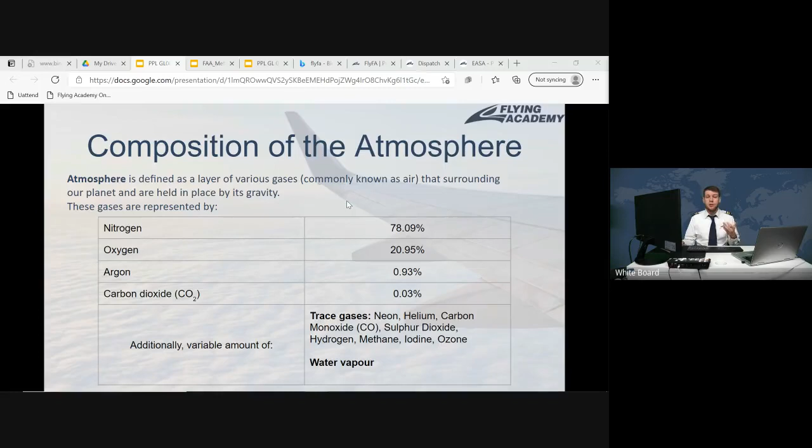Okay, so this is the general composition. And since the atmosphere is composed of gases, those gases in turn compose of what? They compose of molecules, yes? And molecules are physical objects - they are small, but yet they are still physical objects. So they have to obey physical laws, and they have physical characteristics, properties.

So among the properties of the atmosphere, because it's composed of physical objects, we distinguish the following: the most important, the main ones, are density, pressure, temperature, and humidity. So now let's speak about these properties of the atmosphere and how they are interconnected. It's important to understand the relation between these processes - which processes affect what processes and why.

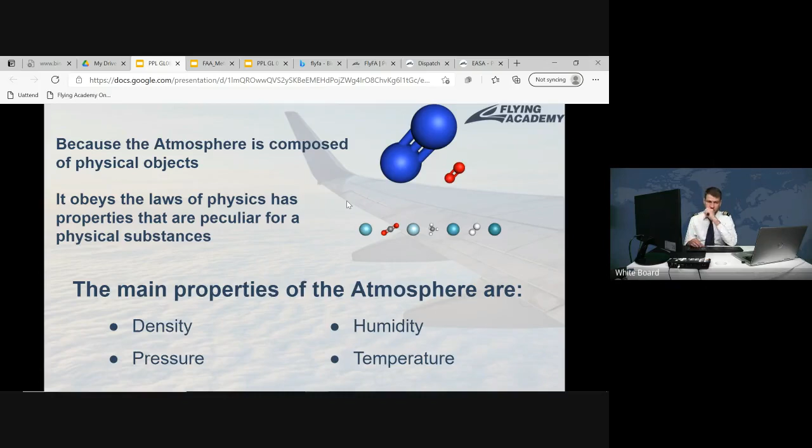So let's start with the density. The electrical charge - it is also a property, I mean a physical phenomenon, but it's caused by friction, basically by friction between the molecules. So we may say it's a secondary property. The electrical charge is not directly participating in the weather phenomena that we are describing - it's like a consequence.

Okay, so density, no problem. Density can be defined as the mass per unit of volume. Normally, those SI units, international standard units, operate with the parameters of kilograms per cubic meter. So this is the density - basically the amount of molecules per unit of volume.

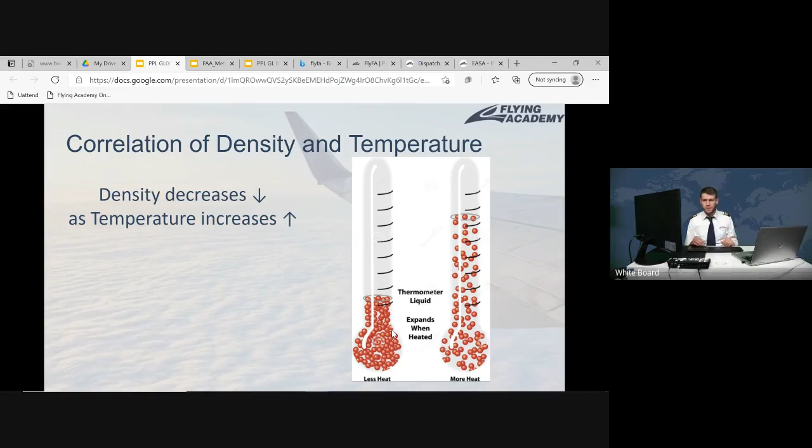So where is this force originating? Molecules of the air, as any other fluid, are in constant movement.

So we have some problem with the internet.

The video is slowly loading, but those molecules have certain movement. And when they collide with the ceiling of the container, with the walls of the container, they exert some force. So this force transferred per area of the container where they collide produces the pressure. So if density increases, pressure increases as well, because you leave less space for those molecules.

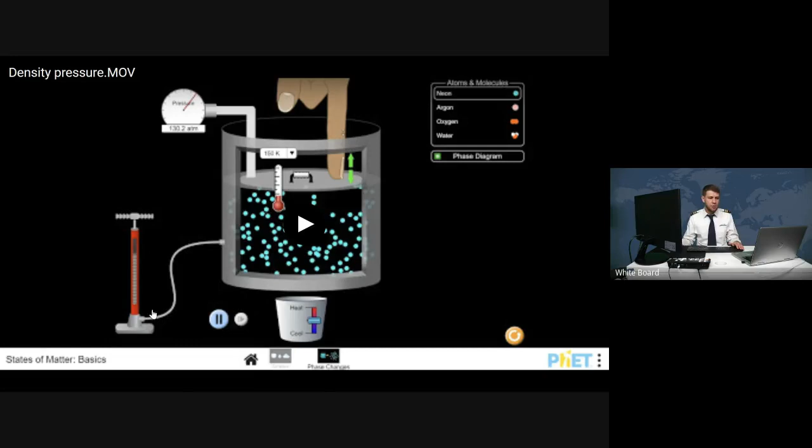So you leave technically less space for molecules. They collide with the ceilings of the container in this example more often, thus exerting more force. So your pressure increases. Plus, you decrease the area. So even though the force is the same, you're reducing the area, so the pressure is rising. Clear?

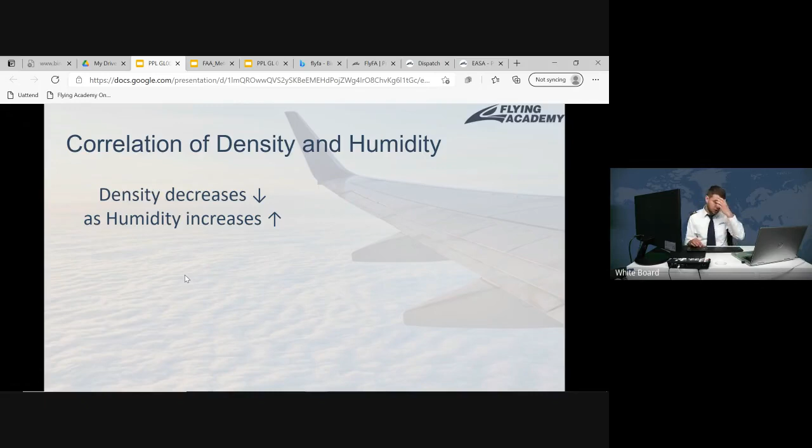Next one. Density and humidity. So when humidity increases, the density actually decreases. We are now speaking about the density of the air. Why does it happen? If we go deep inside the physics, we have Avogadro's law, which says that equal volumes of gases at the same temperature and pressure contain the same number of molecules, regardless of the chemical nature and physical properties.

But more simply speaking, the molecule of the dry air weighs more; it has more molar mass than the molecule of the water. So when you have some parcel of air, and you substitute molecules of the dry air, which has higher molar mass, with the molecules of water, which has lower molar mass, you will reduce the weight.

And since the density is defined as kilograms, correctly speaking it's not the weight, it's mass, okay? If to be super precise, it's mass. Weight is force. Mass is the quantity of the matter. So we are speaking about the mass. So you will stuff this parcel with lighter molecules. You will decrease the mass. Density is kilograms per cubic meter, so you decrease the density by the physical definition. Clear? So less kilograms, less density. Good?

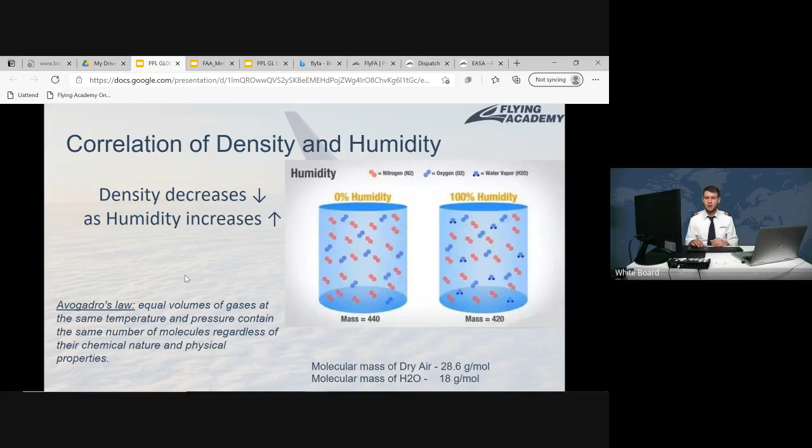Next one. Pressure. What is this? Pressure is the force which is applied per certain unit of area. You should remember this from the principles of flight. So this is the force applied per unit of area. Force is measured in newtons, area in meters squared. And this force, newtons per meter squared, is the pressure, which is pascals.

When we are speaking about the atmosphere, where is this force originating from? We have the mass of the column of air, the mass of the atmosphere. This atmosphere is, wait a second.

So we have the atmosphere. Atmosphere is composed of gases. Gases are composed of molecules. Molecules are physical objects. Physical objects have mass. So you subject this mass to acceleration, and the acceleration is what? Our gravity. So you take the mass, you subject it to gravity, and you receive your force. And then this force, per unit of area, gives you the pressure.

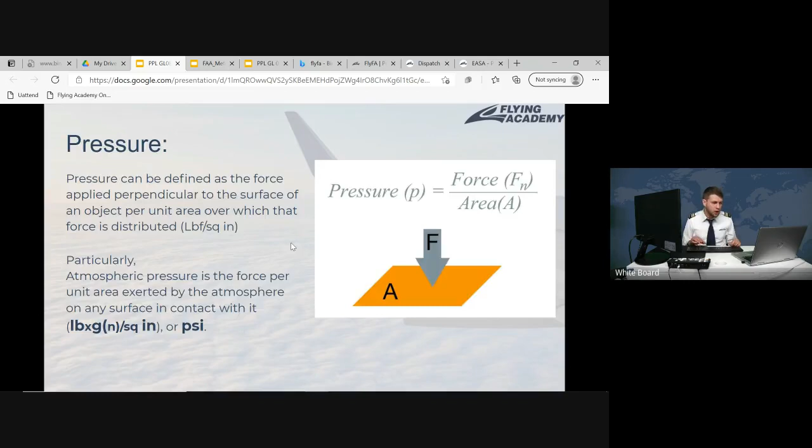So now let's speak about the correlation of atmospheric pressure and height, because technically this is the most important thing to understand here. As the height increases, atmospheric pressure decreases. Why does it decrease? Because our atmosphere doesn't exist endlessly. Somewhere it ends. And the atmosphere is molecules. Those molecules are spread up to a certain extent, and then nothing, and then space.

So by this logic, we understand that we will get less and less molecules the higher we go, because somewhere it should end. Plus, lower layers of the atmosphere contain more molecules, because imagine the top level, the end of the atmosphere: you have a certain amount of molecules, but there is nothing from above which pushes them down, because there are no molecules.

Then you go a bit lower, you have slightly more molecules. And these molecules are attracted to the Earth by the gravitational force, plus by the force that the upper molecules exert on them. And then you go down, the same process, but more and more molecules above you are pushing you down, all the way to the ground, to your observer's position.

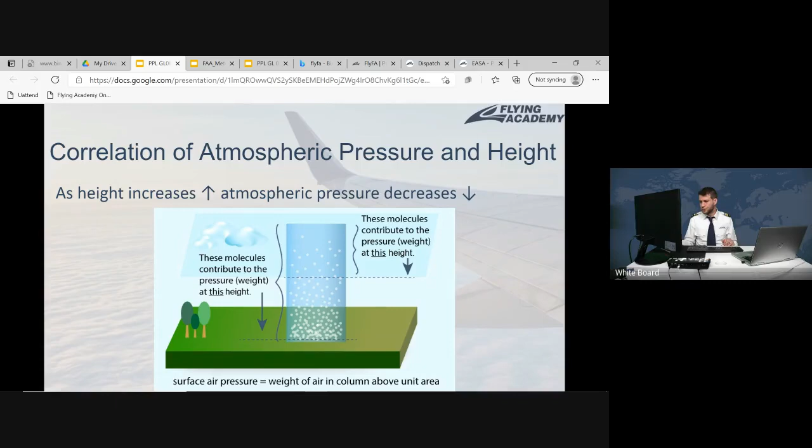Speaking of pressure, this relates to the international standard atmosphere, but the slide specifically about the international standard atmosphere will be later on. But we have the concept of standard pressure. Pressure may be different from day to day, from period of day to period of day, from location to location, but we have a standard one.

Yeah, science likes a lot to, wait a second, David, Nahmat, if I could ask you to disconnect the camera, can you please? Yeah, thank you very much, sir.

Science likes generalization. It's not practical to check the pressure at each and every location on any day, because we will not have an agreement on what the reference datum is. We need to do calculations, we need to build scientific models. We need some uniform datum. So this is about this uniform datum. This is an average.

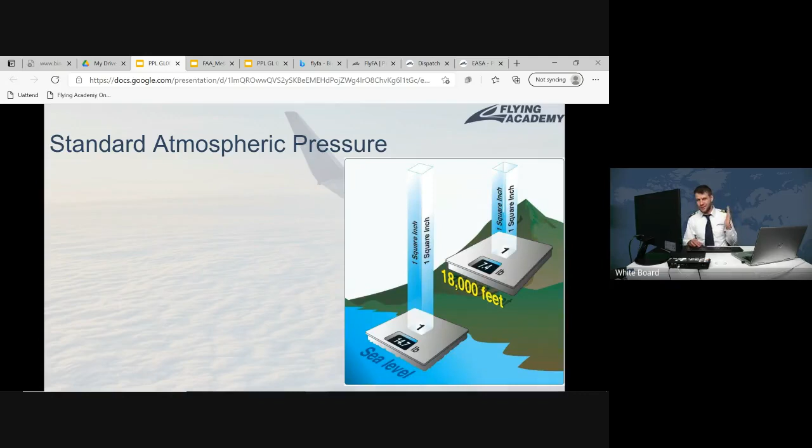Now the American variant. You guys in America don't use hectopascals. You use inches of mercury. So where do those inches of mercury originate from? The initial concept is the same. You have a sealed column of air that has a footprint of 1 square inch, because in America area is measured in square inches, not square meters. This column of air occupies the area from sea level to the end of the atmosphere, and the mass of this column of air will be 14.7 pounds.

Then this column will be subjected to acceleration, and you will get 14.7 pound force per square inch. So that would be 14.7 psi of force. But if you had any experience with aviation, you will most probably not recall this number or formulation. This is because historically the pressure was measured in inches of mercury in the mercurial barometer.

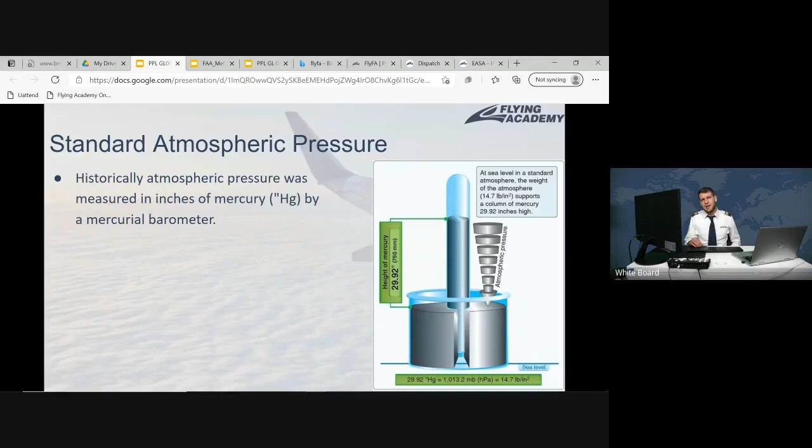So basically, whoever is in charge of developing the standards of measurement decided, let's keep these inches of mercury, it's convenient. So we will derive standard atmospheric pressure by measuring how much mercury will be pushed up in this, I don't know, jar or whatever it is. I just forgot the right word. So how many inches of mercury will be lifted up in this assembly when atmospheric pressure acts on the mercury in this container. Cylinder, let it be.

So 29.92 inches of mercury will be lifted up by the standard pressure, by the average weight of the atmosphere, which is equal to 1013 hectopascals. So in the world, we have two systems, hectopascals and inches of mercury. But in both cases, we have a standard, and this standard is 1013 for the metric system, and for the US it is 29.92 inches of mercury. This is the pressure.

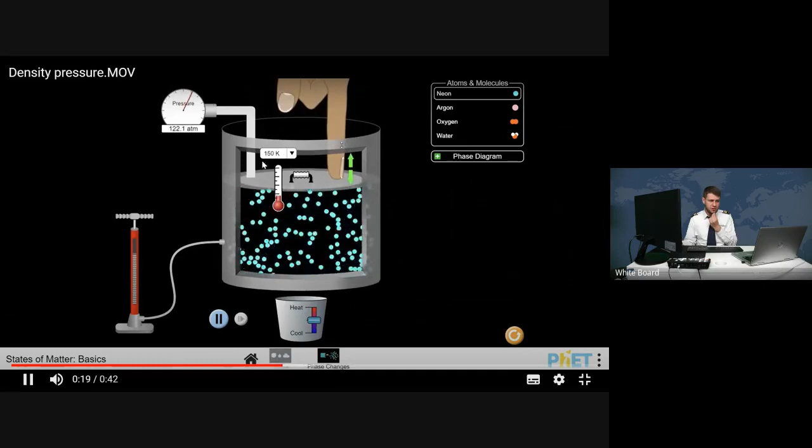Now, correlation of pressure and temperature. When the temperature increases, the pressure will also increase. It can be seen here on this example. When you increase the pressure, the temperature also increases, because these molecules collide with the walls of the container, they release energy, and heat is also a form of energy, right? So you have more energy, more heat, so the temperature increases as the pressure increases.

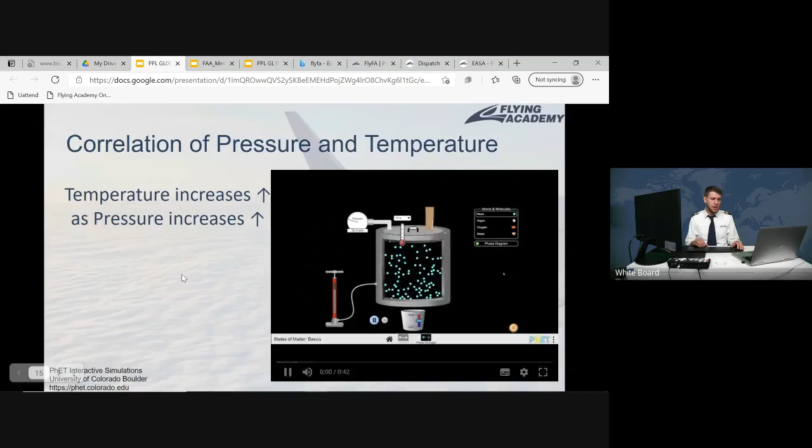Then, correlation of temperature and height. As the height increases, the temperature, you most probably know, because many of you were flying on airplanes, and pilots normally make announcements like, ladies and gentlemen, the outside temperature is minus 56 degrees. Even if you took off from Dubai and are flying to some warm country. It decreases as the height increases. Why does it happen?

Maybe someone can tell, by the way, why it's happening. 3, 2, 1. Okay, it happens because of the expansion. Pressure decreases, the expansion happens of your, let's say, parcel of air, it expands. And this expansion, it takes energy for this parcel of air, it requires the energy to expand.

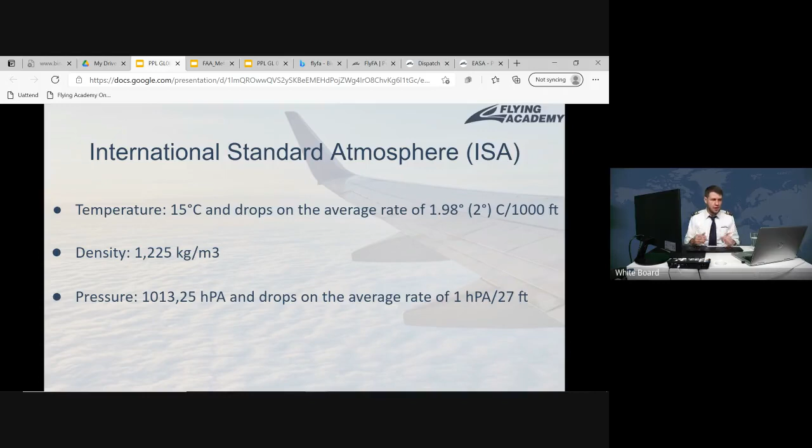So from 70 years of observations, we derived the standard data. Temperature 15 degrees and drops on average 2 degrees per 1,000 feet. Density 1.225 kilograms per cubic meter. And pressure 1013 hectopascals and drops on average 1 hectopascal per every 27 feet. And all of this data is at mean sea level. Mean sea level is again another unification of the model of the atmosphere.

QNH, yes, this is the pressure at the mean sea level. Yeah, at mean sea level. Guys, this is important. Our values are all at the mean sea level. We cannot say that standard atmosphere is if we measure it next to our home, let's say, and our home has a certain elevation above the mean sea level. No, it's at the mean sea level.

And further on in ATPL, all the questions that will require calculation of the temperature, you will use the logic that 15 degrees is at the mean sea level if the question asks you to calculate according to international standard atmosphere. The sea level is the level, it's the Baltic Sea, if I'm not mistaken. Yeah, but the level of the sea is pretty much identical worldwide. So this is why it's taken as the average, because it's some uniform reference.

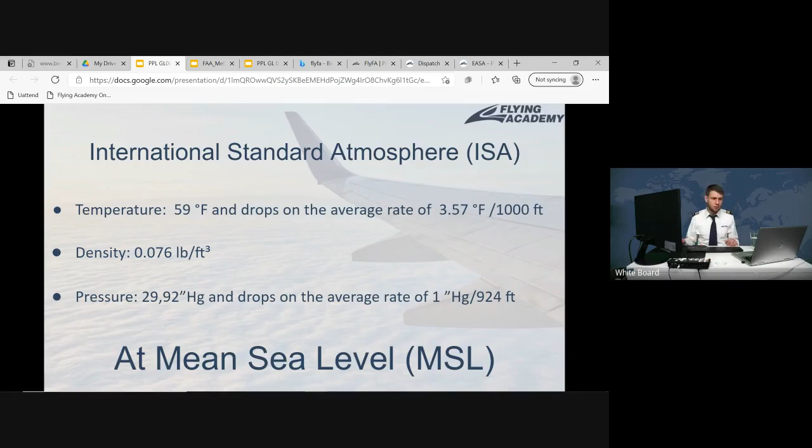Guys, let's open the worksheet from today's class. All of us have the link? Tell me if not. Make sure that you are logged in to LMS. Okay, I'll send the link. So that's the link, and let's proceed with the first task, which is general. You're welcome. Number two. Sorry, three. Number three. Guys, you can do it from your computer, and let's give some time to other students to finish these questions, and then we will go together.

Okay. Was this emailed to us? One more time, please. I was asking if this attachment was emailed to us. The worksheet. The link for the worksheet, it's here. Leonidas, check if you are logged in to LMS. Maybe that may be the case. Yeah, that might be it. I'm on my phone right now. Sorry about that. Okay, I'll.

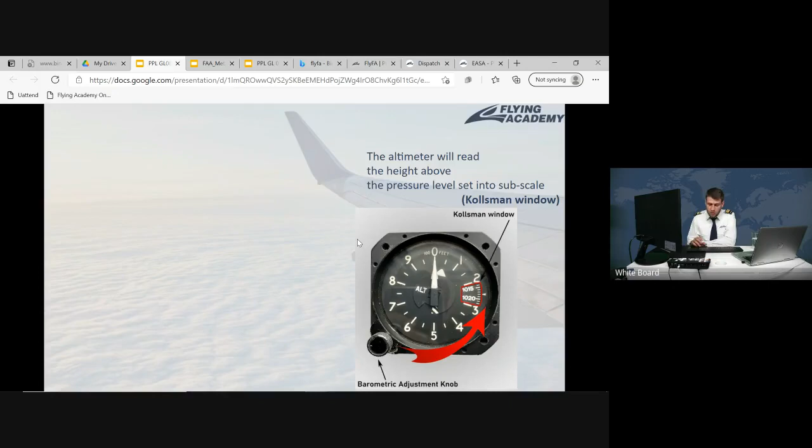We'll speak about it now, how they are, what stands for what. So this Kollsman window, and here you have, let's say, pressure at the aerodrome level is 1018 hectopascals.

Now imagine, purely theoretically, that this aerodrome is located at sea level. Actually, sea level is irrelevant—not necessarily sea level, but standard atmosphere properties are present. Our pressure drops at the rate of 1 hectopascal per every 27 feet. So here you have this amount of feet: 0, 27, 54, 81, up to 270 feet.

And here you have, on the left, the corresponding change of difference in hectopascals. Because it's 1 hectopascal per 27 feet, so per 54 feet that would be 2 hectopascals, etc.

Now the altimeter senses changes in hectopascals, because those aneroid bellows react to changes of ambient, surrounding pressure. But instead of showing you what your current pressure is—however it's possible, like if it was constructed as a barometer, then it would just show you the decrease in pressure—this altimeter's scale is calibrated not in hectopascals or whatsoever, but in feet. Since we know the ratio between feet and hectopascals, we can display these changes in hectopascals as feet.

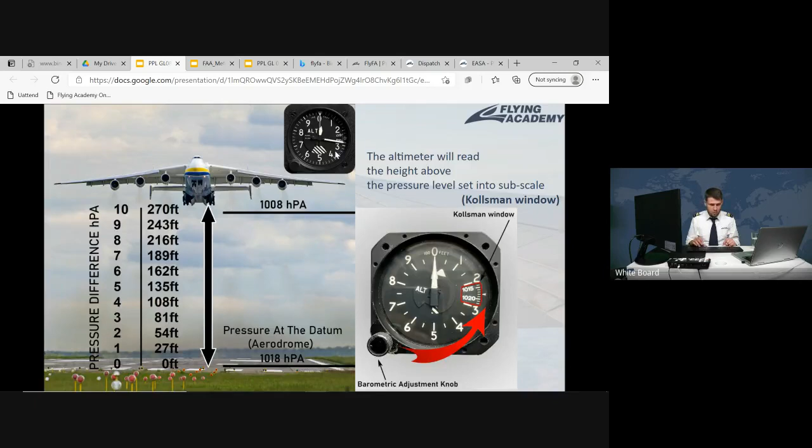In the United States, guys, same logic—the physical process is the same, but we remember 1 inch of mercury per 1,000 feet of altitude. Let's say here the pressure difference is 0.3 inches of mercury. So it shows you 300 feet, in standard atmosphere. The logic is the same.

And again, you have the Kollsman window, you select your reference line, and here you go. Now, as pilots, the thing is, we're not always interested in it showing us the vertical distance from the aerodrome. So here is about the questions—that is easier. The American option is also not very complicated.

What I wanted to say is this is about the question we had before in class about QNH and other Q codes which are relevant to altimetry. We are not always interested in it showing us the vertical distance from the ground. What is the solution? Select another reference. So if we're speaking about the pressure at the aerodrome elevation, as previously shown on the picture, then we refer this to QFE, and the readout of the altimeter would be height.

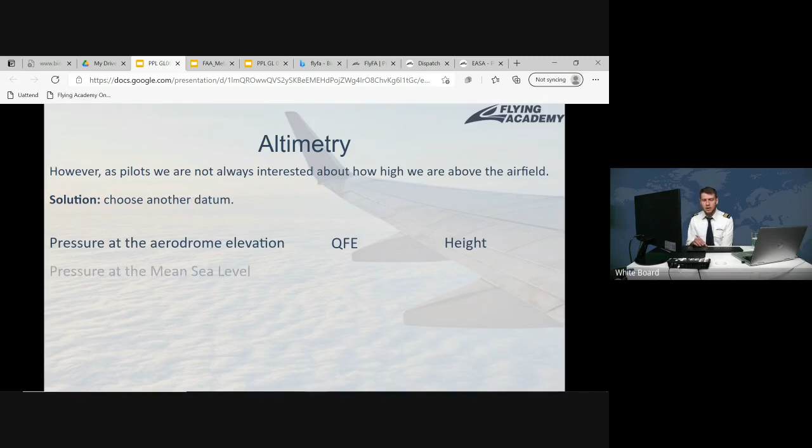So if you select a reference of the altimeter as the pressure at your aerodrome level, the altimeter will show you the height. If you select the pressure datum reference at sea level, that would stand for the Q code QNH, and the altimeter will show you the altitude. If you select the standard pressure, 1013 hectopascals, the altimeter will show you the pressure altitude. The Q code for this is QNE, and sometimes this pressure altitude is also called the flight level.

Okay, so if we have 1018 at the airfield, but I don't calibrate, I will get a minus-VE altitude reading. What does minus-VE stand for?

Yeah guys, I lost the thread. So, negative about what? If I have 1018 at the airfield but I don't calibrate... okay, you have 1018 at airfield and you don't calibrate. Sorry, I didn't get the question. Like, I get a minus VE altitude reading.

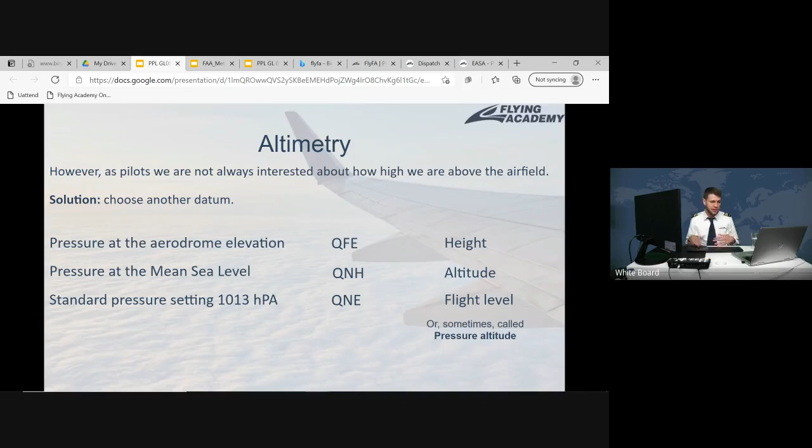Okay, so this is how this graphically works. Let's say you have the airfield. The airfield is located at a certain location. You measure the pressure at this airfield location, and from here you will have your height, AGL, above ground level - in this case AAL, above aerodrome level - the altimeter will give you the height.

But this is not really cool, you know, because different airports, even if they are spaced relatively close together, they still may have different pressure between each other, and there will be no uniformity. It doesn't make sense to select altimeter according to the pressure at specifically this airport, because that would be applicable only to this airport. You go to another airport and it doesn't work anymore.

For example, Parash, yesterday you were flying - QNH of Letnany and Kbely was 1019 and of Praga 1020, or vice versa, I don't remember. But anyway, pretty closely located airports, but still different pressure. So it doesn't make sense to use this as the reference.

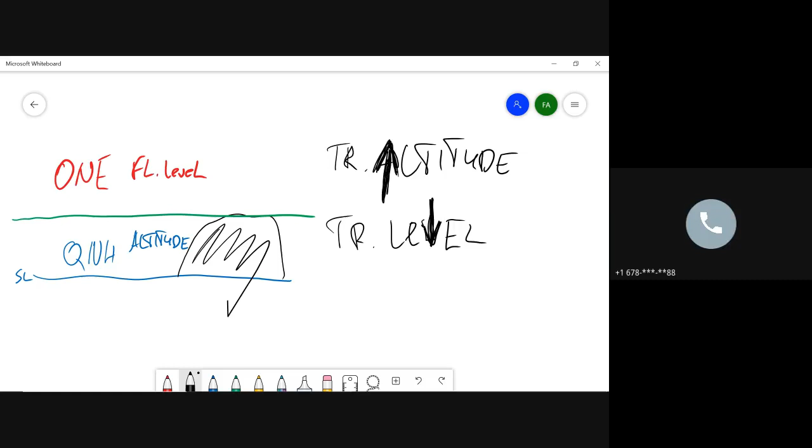It can also be understood because in this region your vertical distance is referred to as altitude, so of course that's the transition altitude, where you change to the standard pressure setting. On the way back, you're flying under flight level, so you change to altitude - that's the level where you change, the transition level. In between them you have the transition layer. This is, rather from operational procedures, the layer where these transitions happen, the designated vertical distance where resetting of the altimeter can occur.

So again, QNH is the pressure at sea level, and when we fly according to the pressure at sea level... every country has its own designated list of transition altitudes and levels. For example, the transition altitude in the Czech Republic is 5,000 feet. So if you climb higher than 5,000 feet, you have to change the reference of the altimeter from QNH to QNE, and your vertical distance starting from 5,000 feet would be referred to as flight levels.

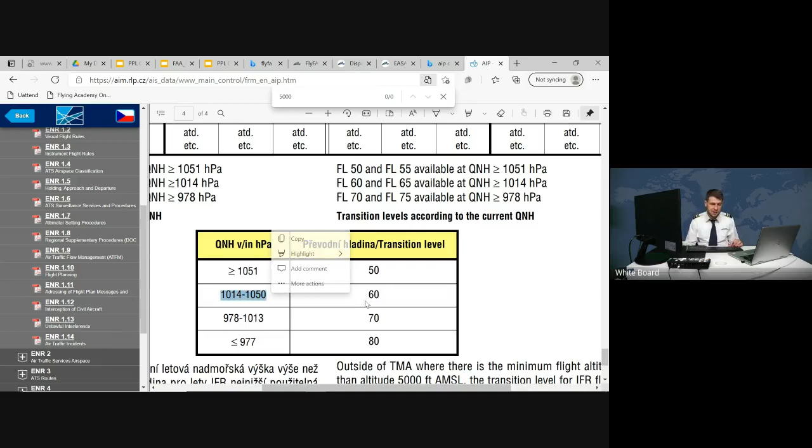And then transition levels, they are actually changing. There is even a table depending on which QNH, which transition level would be in use. So the lowest one can be 50, correct, say, if the QNH is within this range from 1014 to 1050 hectopascals, that would be 60, and so on. But for now, that's enough. Okay? Clear? Now,

the thing is with the altimeters that they are all calibrated to the ICAO standard atmosphere. All altimeters are utilizing the logic that 1 hectopascal of change would be indicated on the altimeter as 27 feet of altitude. And 10 hectopascals would be indicated as 270 feet. All the time, all altimeters are working in that manner. However, it often doesn't happen in reality. But altimeters, they don't know about this. So,

okay, two questions. How does this affect us, and why is it happening like this? Let's start with the second question. Why are all altimeters calibrated to the standard atmosphere? Well, because basically we need some uniformity. The altimeter should be working according to some standard pattern. Otherwise, best case scenario, you will have to manually readjust this altimeter using some tables, and it will increase the mistake.

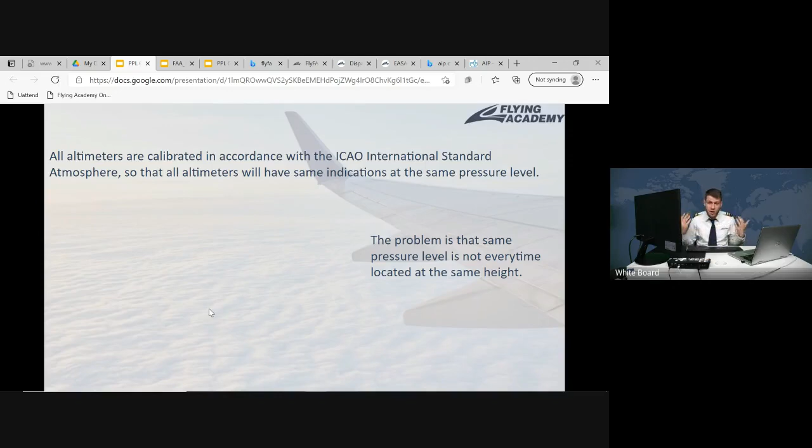After all, we really don't care about those mistakes much. There are exceptions, in some cases we care very much, but generally we don't, because when the airplane is airborne, we are more interested in maintaining separation between other airplanes. And if all the airplanes around you have the same altimeters, they all would be subjected to the error with the same magnitude. So if your altimeter shows you less altitude than you actually are, so does the altimeter of the airplane next to you. So still the indication would be the same. We do care about this in proximity to the ground and obstacles. However, step by step.

Where is this problem originating from? We said that the altimeter is calibrated so that 1 hectopascal of pressure gives you a reading of 27 feet of change of altitude. Now, for a second, let's put aside the hectopascals. Simple example. You have 3 columns of air. One is the standard one, another is colder and warmer. They all contain the same amount of molecules, and consequently, they all exert the same pressure at the bottom, 10 units. Not hectopascals, not inches of mercury, just 10 units of pressure at the bottom in each case.

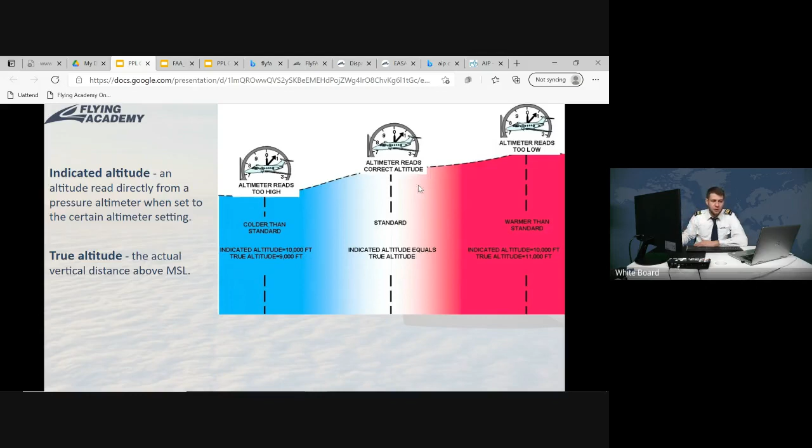But in warm air, since the column is expanded and thus the level where the pressure peculiar for the standard atmosphere is located at a higher height, your true altitude would be more. And in colder air it's vice versa. Here, again, this is the isobar, the line that joins equal pressures.

In warm air at a certain height, you will have higher pressure than in colder air because of this picture. Always imagine this column of air which has 10 at the bottom and 0 at the top. The warm air column is bigger, so for a certain height it will have higher pressure than the column of cold air. Okay, write me if it's clear, because it's just in front of you in the picture.

Take the upper portion of the column. Here is 1. Do you see the mouse pointer? Here is 1, but here is already 0, and here is already 0 for a long time. Or here is 9, here is 8, here is 6 in the cold air column. Makes sense? For the same vertical distance, you have higher pressure in the warm column of air.

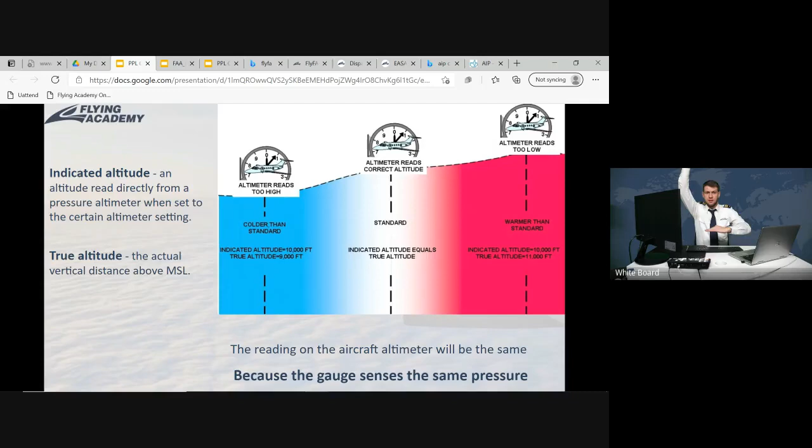So again, at the same level, for warm air, the altimeter will think it's a lower altitude. Yes, roughly. Because the pressure increases the lower we go. So if you had 10 at the bottom, 0 at the top, and you expanded it, it will think that, yeah.

Okay, so let's go to this altimetry classwork part 2. Is this the reason why in denser, colder air it is easier to take off and land smoothly than in higher temperatures? This is density altitude. Density decreases as temperature increases, so it's not directly the reason, but temperature is the guilty one here.

So in cold, yes, Jeremy, the cold air is more dense. So with each bite of your propeller, there are more molecules propelled, and the performance is consequently better.

Okay, so let's open the second task, and there are 4 questions. So I'll give you 5 minutes. We'll go through them and we'll make a break.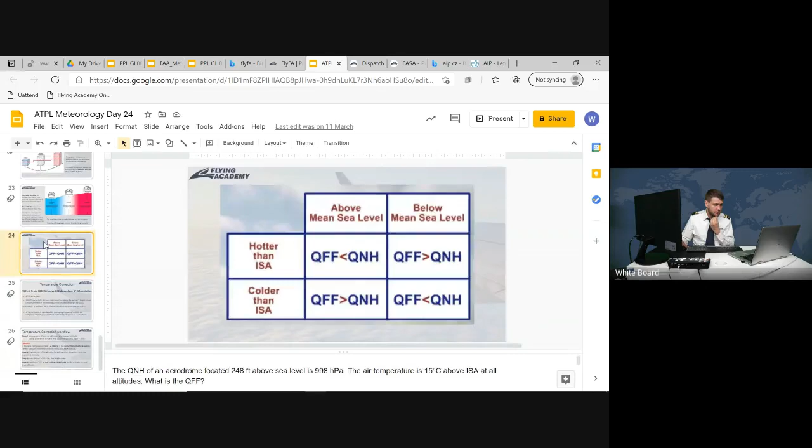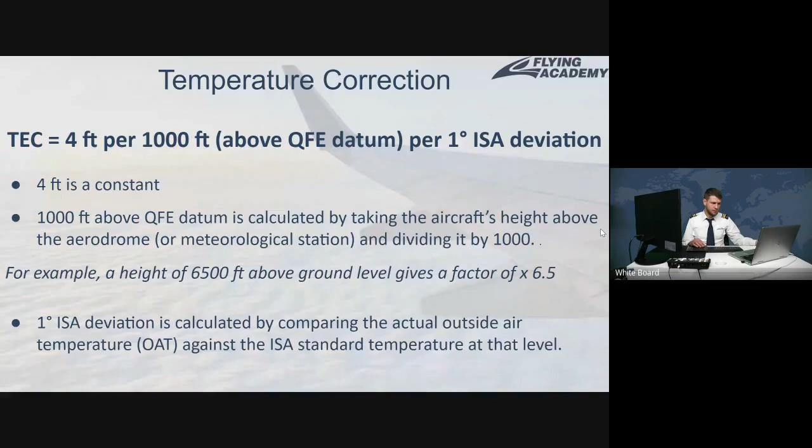So one vertical distance, so altitude, from mean sea level for sure. Now I'll give you the slide. It's from the ATPL class. Take the picture. This is the QNH and the QFF. Read at home what those stand for. Make a screenshot. And also altitude correction for non-standard temperature. Temperature correction. And next slide.

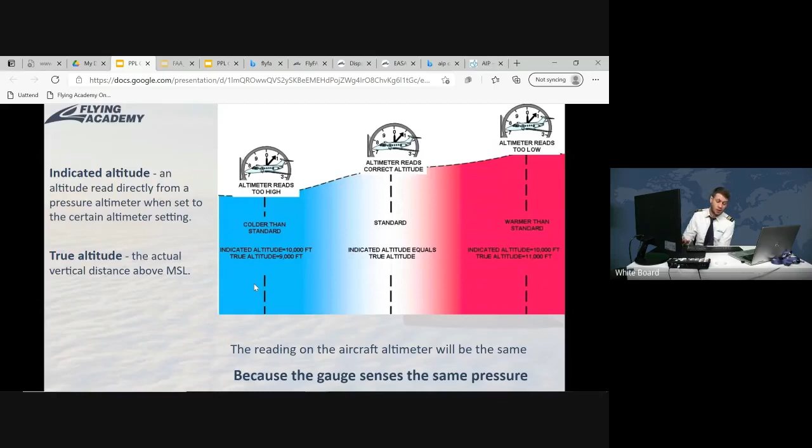Weather, finally. Almost there. Almost weather, but there will still be one more deviation. How can we define the weather? Here, the weather is the state of the atmosphere. More specifically, the behavior of the air.

Okay, guys. What's the time? Am I not early?

Yeah, so fine. The state of the atmosphere, the behavior of the atmosphere, and how we can describe this behavior. What is the behavioral setting of our atmosphere? Well, the most important is that it's in constant movement. It doesn't just reside at a certain location. It's moving somewhere all the time, and where it moves, let's figure out.

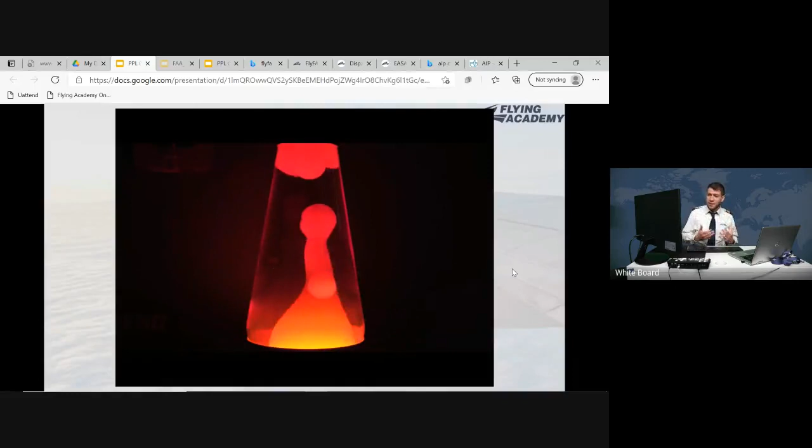I think the best illustration of what's happening in our atmosphere is the lava lamp. Let's look at the lava lamp. We will not look 5 minutes at the lava lamp, but what do we have here except for the advertisement of Koshek CZ? We see the lava lamp where some paraffin substance goes up and then goes down, and then goes up and then goes down. And why is it happening? This is something related to the temperature and the density.

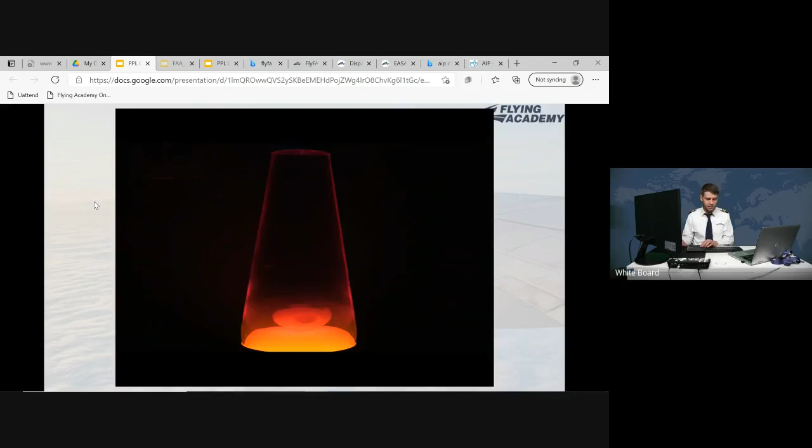Let's figure out what exactly. Deeper investigation of what's happening. Lava lamp. In our atmosphere, as in a lava lamp, hot matter rises, cold air goes down. So what goes up must go down eventually, and our universe doesn't allow us to create a vacuum. So nature fills up the emptiness.

So these three fundamental parameters are in charge of the atmospheric processes that are happening on our Earth. Hot matter rises, what goes up must go down, and nature fills up emptiness. Why does hot matter rise?

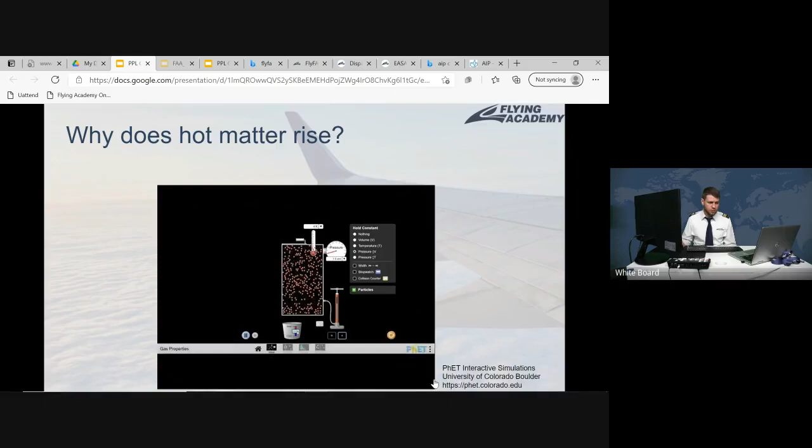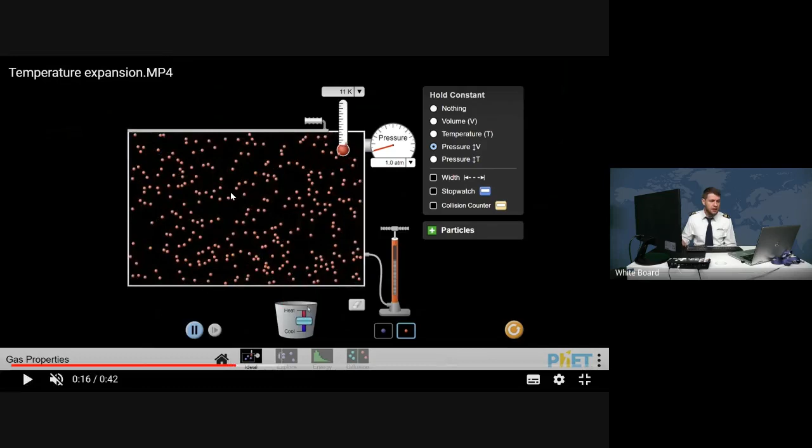So the hot matter rises because when you heat the parcel of air, so let's say this container, I didn't find better animation than this container, but let's say this is a parcel of air. When you heat it up, it expands because heat is energy, the molecules receive more energy, they start moving more actively, colliding against the walls of the container, thus expanding it.

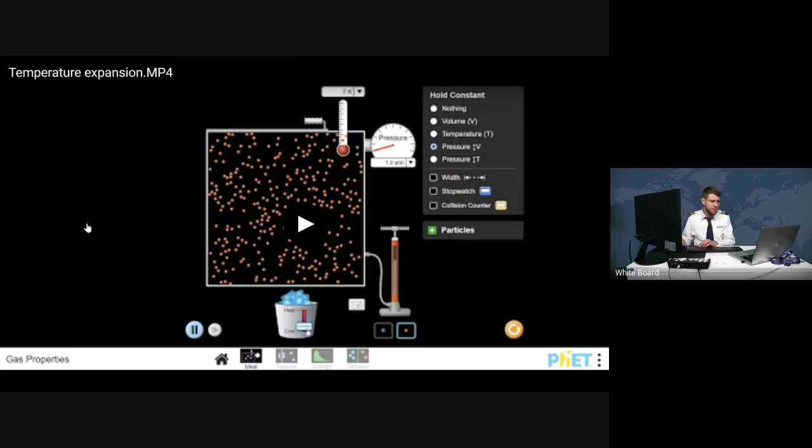And when you cool down the air, it shrinks, you decelerate the molecules, so they are not expanding the boundaries of the parcel of air that much anymore. So we have heating and expansion. When this expansion happens, volume increases. When volume increases, density decreases.

And as a result, since the density decreases, the less dense air floats above more dense, colder air, just like less dense objects float on top of more dense ones. For example, this piece of wood floating on the water. Why doesn't this wood sink? Because it has less density. The same here, but this density decrease is caused by heating and expansion. Clear here?

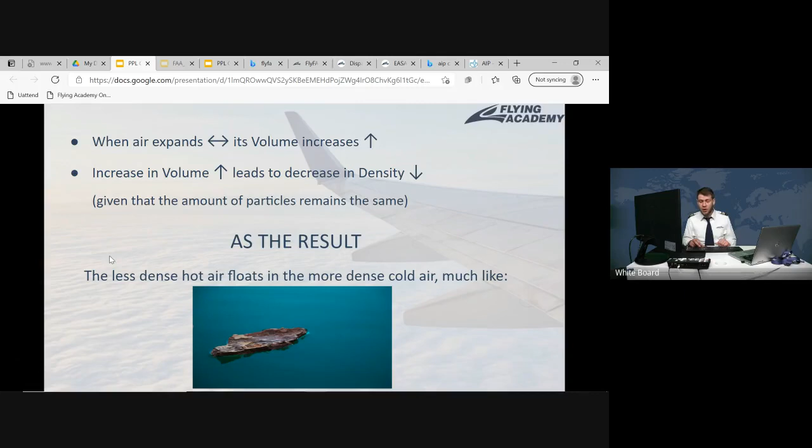Guys, it's important to understand that the atmosphere is heated from beneath, as in a lava lamp, not from above, not by the sun. If the sun heated the atmosphere, first of all, the higher we go, the hotter the air would be. But more importantly, we would not see the sun, because if this electromagnetic energy, which is also light, were absorbed by the air, we would not see the sun. So the air is kind of transparent for sunlight.

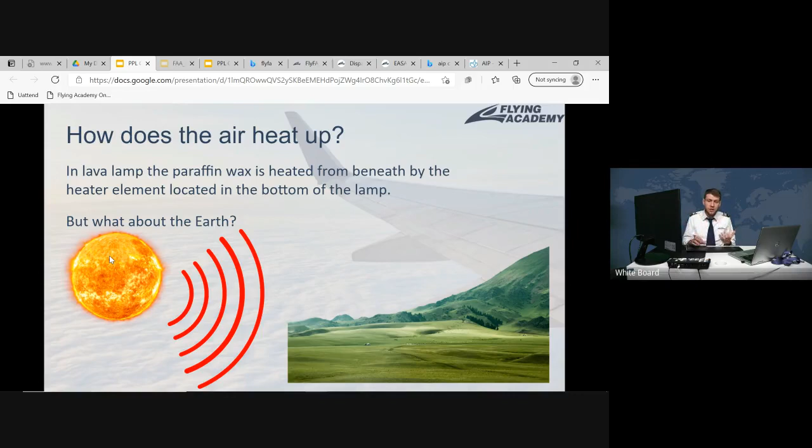However, even though the air doesn't absorb it, the ground willingly absorbs the sunlight, and then it re-radiates. Exactly, Jeremy. Radiation from the Earth's surface, which is hotter than the air. The ground re-radiates this received energy to the air. So the ground heats the air, and as a result we have basically the same as in a lava lamp: there you have the coil beneath, and in the atmosphere you have the heater beneath, which is the Earth.

Good. The ground in this case is like a translator for the air. It translates the energy to the language which air can understand and pick up. So the air can pick up heat from the ground, but not from the sun. Okay.

Reflection is a bit different. When you have reflection, you don't have heating at all. For example, there are more reasons, but in winter it can be a sunny day, but you will not have any increase in temperature. Slightly you will, but this is rather due to concrete buildings. When you have reflection, the energy goes back to space where it came from.

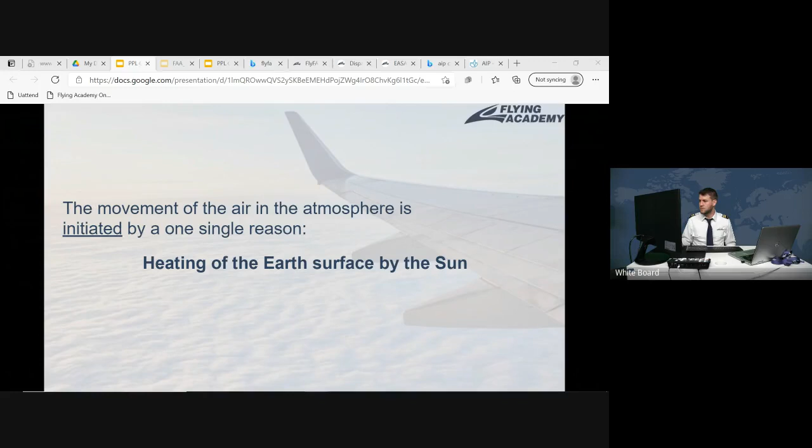So the vertical structure of the atmosphere. The atmosphere is divided into 5 concentric layers: the troposphere, which is where we exist and where most of the flights are conducted, the stratosphere, the mesosphere, the thermosphere, and the exosphere.

As I said, all of the things that are in scope of this subject are happening in the troposphere or stratosphere, mostly in the troposphere. The division is based on the vertical profile of temperature changes, chemical content, and density, but mostly temperature changes.

Each of the layers is divided by a so-called pause. Maybe you heard of the tropopause. This is the layer which separates the troposphere from the stratosphere. Then you have the stratopause, mesopause, thermopause. Those are the divisions separating one segment of the atmosphere from another.

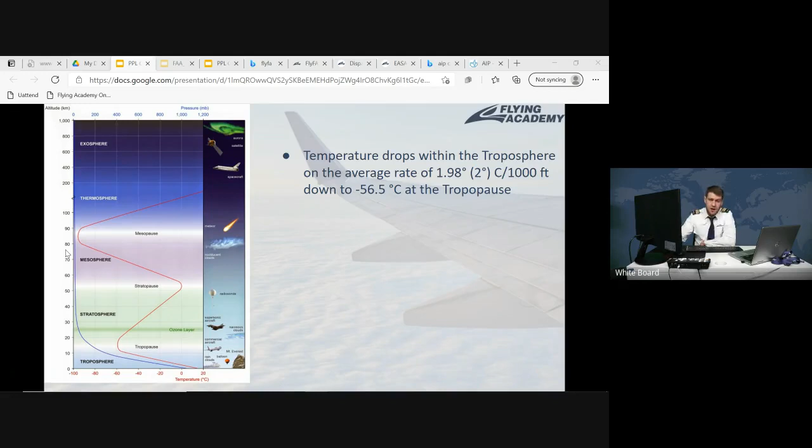The vertical depth of the troposphere, this band of the atmosphere where we exist, is variable. Over the equator it can be up to 20 kilometers, while over the poles it's about 6 kilometers on average. We will speak about phenomena associated with this, but it's important to understand that the troposphere has the highest extent over the equator and the lowest over the poles.

Guys from the US, this is a slide for you. Everything is the same, just converted to US units. A 3.57 degree Fahrenheit drop in temperature per 1,000 feet in the troposphere, down to minus 69.7 at the tropopause. The thickness of the troposphere is up to 12 miles over the equator, and as low as 3.7 miles over the poles.

Why is it happening like this? The hint is uneven heating of the Earth. Polar regions receive the least amount of insolation, thus lower temperature, and we know that at high temperature the air expands. So that's why.

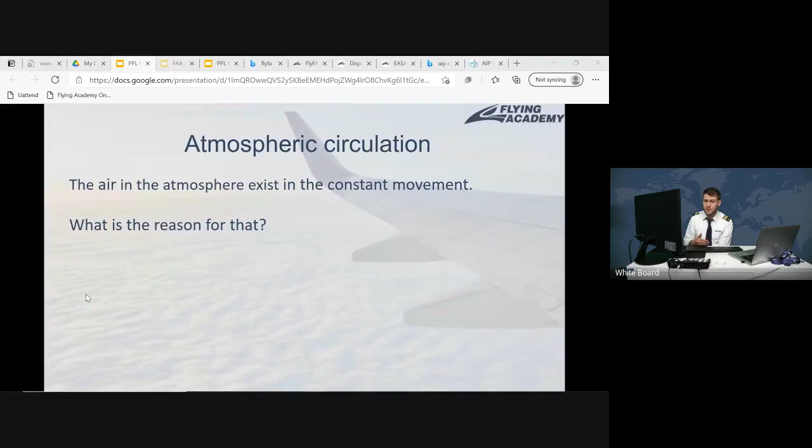Circulation of the atmosphere. Again, the atmosphere is in constant movement. Why? Because of heating, but now we need to add another component: differential, uneven heating. The atmosphere is unevenly heated by the sun, so we have different temperatures, thus different pressure gradients, thus movement. If we had the same insolation everywhere, it would be the same temperature everywhere, with no changes in density or pressure except in the vertical profile.

But then it would be pretty stable, because at low altitude you have higher pressure and at higher altitude lower pressure. So differential heating is what causes the real movement as we know it.

The tilt of the Earth is the reason for seasons—there are periods when the northern hemisphere receives more insolation, and periods when the southern hemisphere receives more. This is because our Earth is tilted 23.5 degrees with respect to the celestial axis of rotation. It's always rotating around the sun while maintaining this tilt, which is why in winter the southern side of the planet is tilted more to the sun, and in summer the northern hemisphere is tilted more directly to the sun.

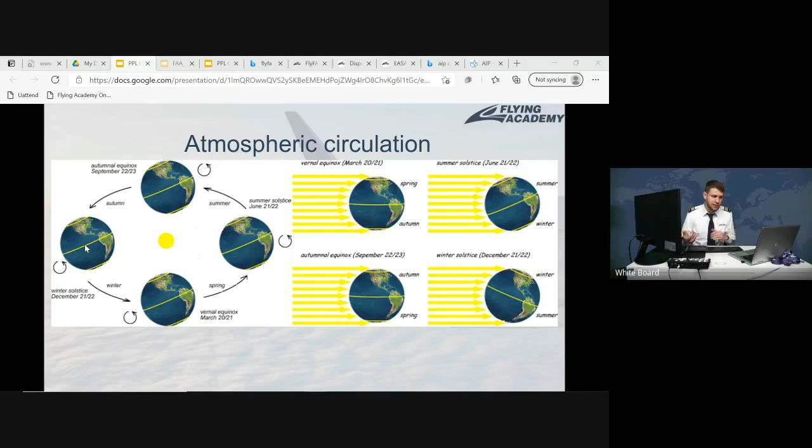So, as the result... no, for example. No, for guys, for PPL stage, EASA guys stick to EASA units of measurement, FAA guys stick to FAA units of measurement—there will be no interchangeable conversions. Such questions were not reported, so I can't say there will never be any, because who knows what Austro Control will add to the testing system later—they don't report what they've changed. If this question appears, it may happen, but it wasn't reported before. This is general—it's about measurement unit conversions. Going into the meteorology subject, it wouldn't hurt to revise the conversion between Fahrenheit and Celsius, just in case.

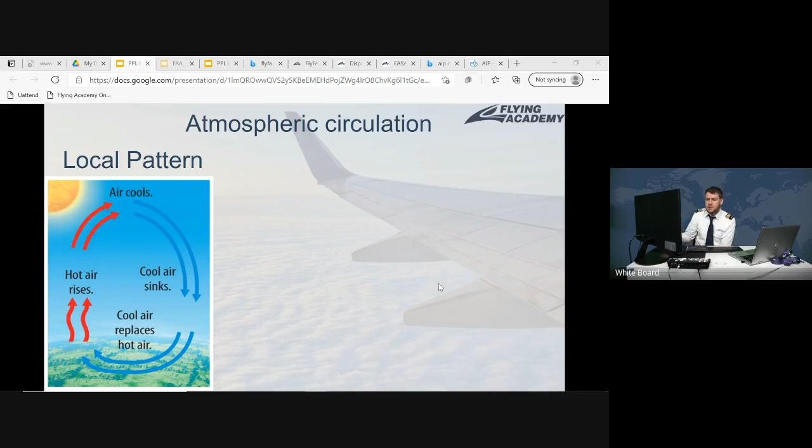So the equatorial region receives more insolation all the time. Now what's the consequence of this? Let's talk about the local pattern, like the lava lamp I showed you—hot air rises, cold air sinks, cool air replaces hot air, and this circulation happens, because of three lava lamp laws: hot, cold, and nature abhors a vacuum. This is the local pattern, but let's speak about something general, since this whole lesson is basically about general things—global patterns, so-called circulation cells. These circulation cells exist because of this uneven heating of the Earth.

Now I'll try to explain them briefly—I really don't want to make it unnecessarily long. As you can see, we have some arrows up and down, representing the direction of air movement. Over the equator, we have an ascending pattern—the air rises because it's hot, like the lava lamp. Then it reaches a certain altitude, cools down, and goes sideways.

Why does it go sideways? There are two reasons. First, there's a limit up to which the air can rise—somewhere it stops rising, since you can't accumulate air endlessly aloft, so it starts spreading away. More importantly, it goes this direction because of the pressure gradient—air goes from the area of high pressure to the area of low pressure, like all fluids in the universe. So for some reason, over the equator, the pressure at a certain altitude is higher than at the same altitude in the mid-latitude region. Why does this happen? Because of this slide.

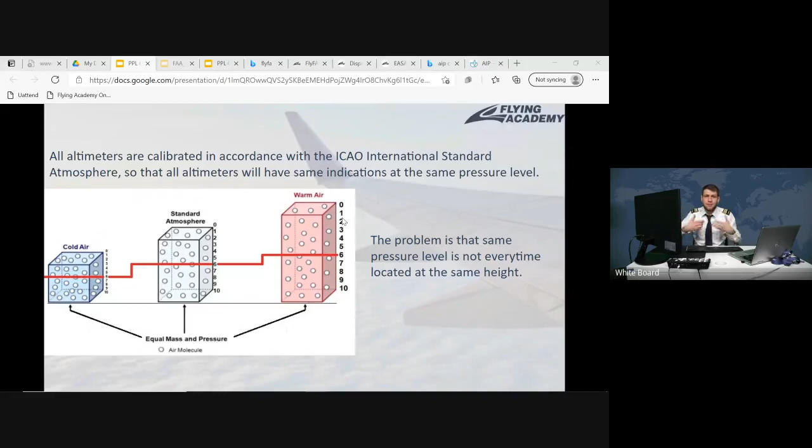Because expanded, hotter air has at a certain level higher pressure at the given height, and since everything moves from an area of high pressure to an area of low pressure...

...we would naturally conclude that if that were real air, we would have movement of the air in the direction to the left, from this area of higher pressure to the area of lower pressure. Make sense?

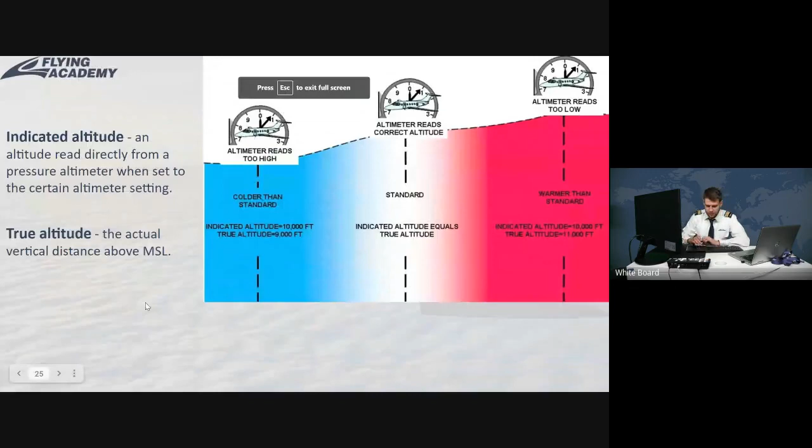Makes sense, yeah. So, okay, what was this slide? Oh, we have a full screen option. Nice to know. Now, 10 seconds, I'll take it back. Okay, so this is what...

Then, look, we explained the pattern over the equator. It goes sideways to the mid-latitudes. Now pay attention to what happens at the lower level: the air goes towards the equator.

Why? Because nature abhors a vacuum - if air is replaced from a certain location, new air has to rush in to fill the emptiness. This is why we have suction of air towards the equatorial region, and so we've explained our first circulation cell.

Then let's go to the polar circulation cell, since we left the Ferrel cell aside for now. What happens here? Cold air tends to shrink, increase in density, and descend - this is the primary startup mechanism here.

It goes down, and since it cannot accumulate endlessly next to the ground, it will go sideways. Make sense? Now here it will warm up a bit and start rising.

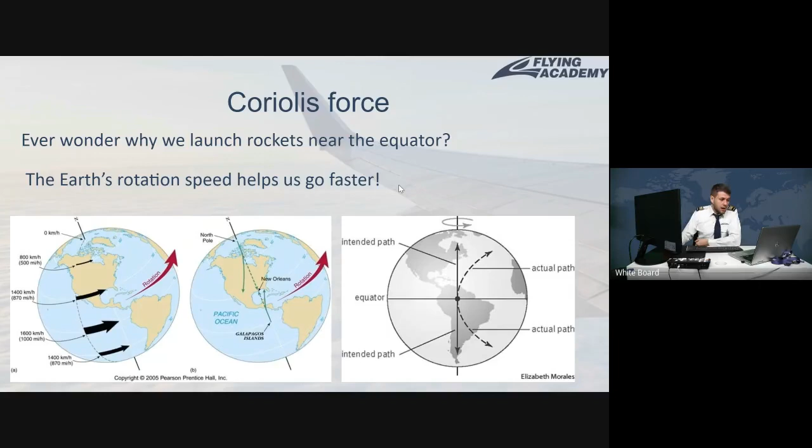And this is why we launch rockets from as close to the equator as possible - which is not really applicable to Baikonur, I believe. They could have found a better location, but there were some strategic considerations for it.

In general, it's like this - so Earth helps us to get speed. Now...

...the air in contact with the Earth also rotates with the Earth, because the Earth brings the air along due to friction.

And because of this, the air at different latitudes have different velocity, different rotational velocity. Now what happens? Now happens this magic.

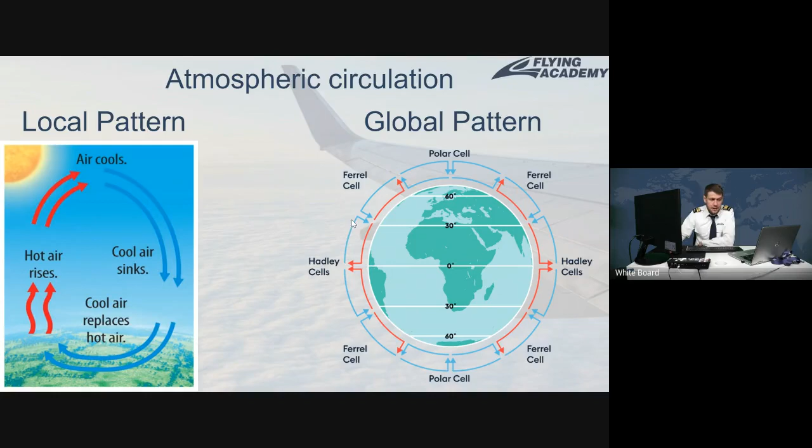We have air moving tendency from the equatorial region to the polar region. As we discussed, what's going to happen with this air when it moves towards the polar region? It will be deflected into the direction of the rotation. Why will it be deflected into the direction of rotation? Because it has higher kinetic energy.

Imagine you and your friends are... I mean, this Coriolis force for some people may be hard to understand, but we will try to make it clear.

Okay, let's do this example. So you have one car. Yeah, I'm a very talented artist. So this is the car. Okay, just use a bit of imagination. So this is the car which travels at 50 kilometers per hour, that direction.

No, it's because, as I explained, we have a tendency at high altitudes for the air to move from equatorial to the polar regions, and now I explain why it's deflected to the direction of rotation. However, magnetic polarization of the Earth, as in gyroscopes, I do not exclude that it somehow may be related. I'm just simply saying that I never heard about this, but it doesn't mean that it doesn't exist. We live and learn all life, so maybe there is.

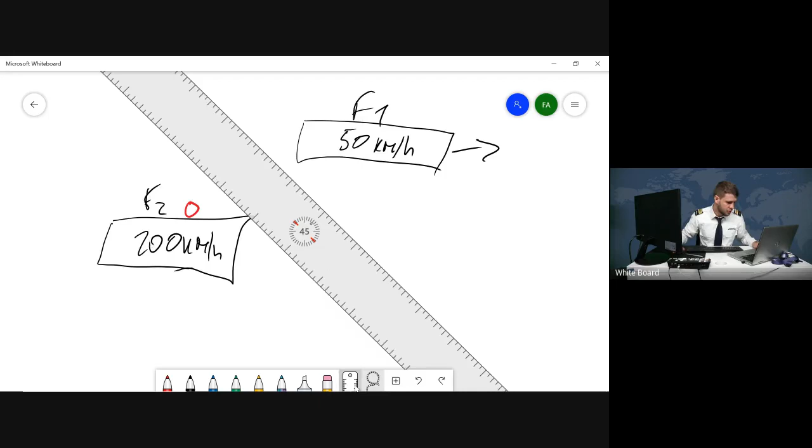So when we will align... somehow I should have, no, I definitely don't need the ruler. Okay, so when this car will approach, and of course it will overtake it since it moves faster, when it will be abeam the second car, and I will drop the ball from this second car to the first one, will it hit this car?

No, because the ball has kinetic energy, so it will miss. It will go there because it has the initial velocity of my car. We were the same system, this ball and me in my car. So I drop it, it still has some leftover energy from my car, so it will not hit the car which travels at 50 kilometers per hour. It will go slightly towards the direction of the movement.

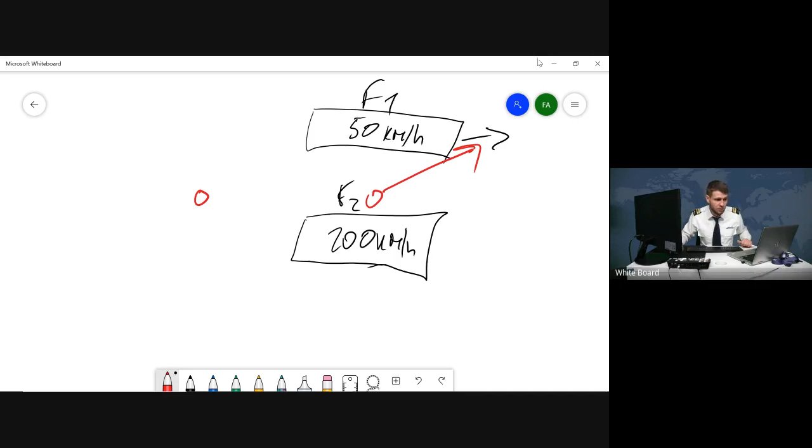So the same happens around the Earth with this global air circulation. The air is deflected towards the direction of rotation of the Earth. When we're speaking about the high altitude pattern, we will now see what happens with the low altitude pattern. Clear? Okay.

That thing that I just described is responsible for the presence of the jet streams. The jet streams normally exist at the conjunction of those circulation cells. So we have subtropical and polar, and sometimes we have an Arctic jet stream, and sometimes we have a tropical equatorial jet stream, which goes the opposite way, but leave it to ATPL.

Okay, normally jet streams are areas, streams of air, jet streams, which are flowing into the direction of rotation, which are happening at the conjunction of the cells because of the pressure gradients.

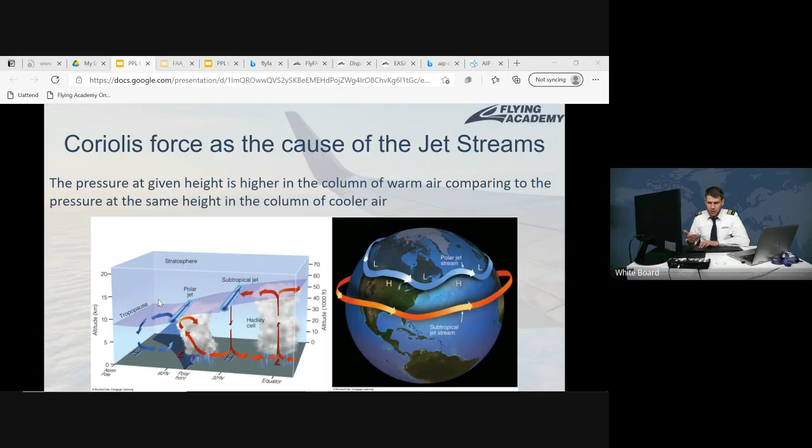It's about the upper pattern. What about the lower pattern? So in the lower pattern, as we can see here, we have a reversed thing. When we speak about the air which goes in the vicinity of the ground, these lower portions, it's deflected into the opposite way. I mean, let me be clear.

It's not a super precise definition of where it's deflected. You can say that in the northern hemisphere, it's deflected to the right into the direction of the movement, and in the southern hemisphere, it's deflected to the left. That would be more correct. I mean, into the direction of the pressure gradient force.

So here, this red arrow is my high altitude wind direction. It goes from the equator to the polar region. It's deflected to the right. In the southern hemisphere, it's deflected to the left, relative to the direction of the movement. Now this green arrow is the lower current of the air.

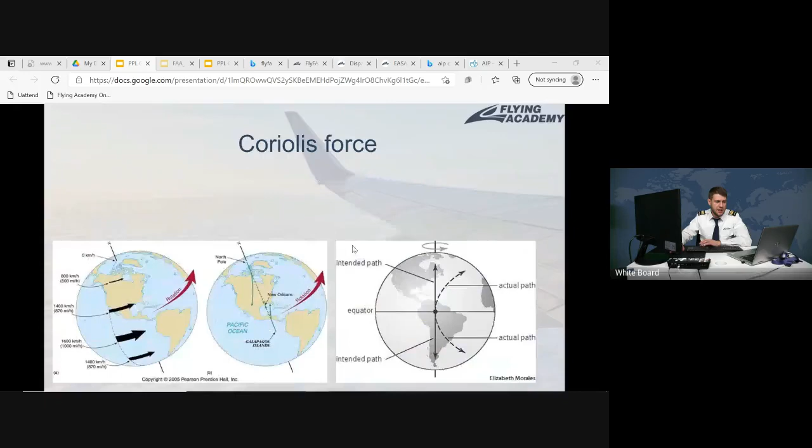So if we take into consideration, for example, this Hadley cell, you see here we have a flow of air from the polar region towards the equatorial region. It will be deflected also to the right, following the same logic as in this picture.

Let's say now I want to drop. How did I do that last time?

How is it selected? Now I want to drop the ball from the car which travels at 50 km/h to the car which overtakes me at 200 km/h. So in this case, the ball, if we are dropping from 200 to 50, this is the high altitude pattern in the equatorial cell, it goes that way.

If I drop the green ball from the 50 km/h car to the car which travels 200 km/h, when they are beam to each other, of course, it will apparently be deflected that way. In reality, it will not be deflected. It's just this car will run away from it, technically speaking. But the apparent direction of the ball will be deflected. So the same as here, this is the Coriolis force.

It's apparent. I mean, this is real deflection of the air, but this is the apparent force which is happening, caused by the different rotational velocities of the Earth. And this is why we have different directions of the winds. Pay attention to this last picture. You see, this is the low pattern wind.

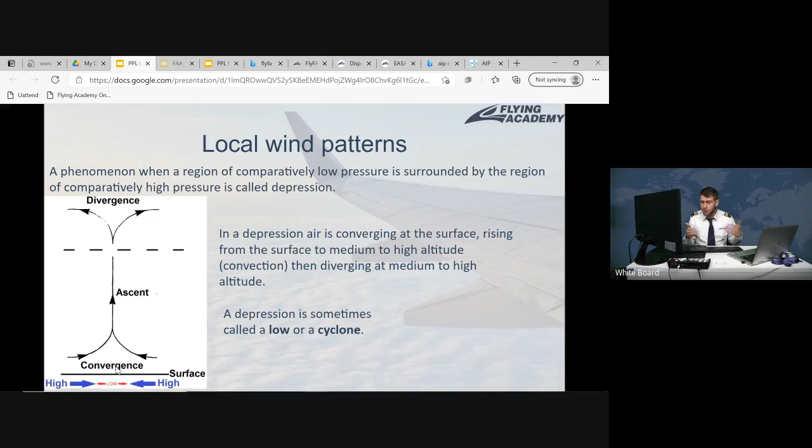If you compress and compress air from above, you will increase the pressure because there is compression. There is always an inflow of new air down. It cannot accumulate endlessly. It will, of course, spread away. Why? Because you have higher pressure, basically, because you try to stuff this air close to the ground.

It's not that it doesn't want to. Just imagine you have a bag and you start packing clothes. You pack and pack and pack until it rips. The same here. Clear? So the area of high pressure is called an anticyclone.

Where can we find these areas globally? Let's look here. At the equator, we'll have an area of low pressure. In mid-latitudes, that would be high pressure. Then there will again be a low pressure area close to the polar region.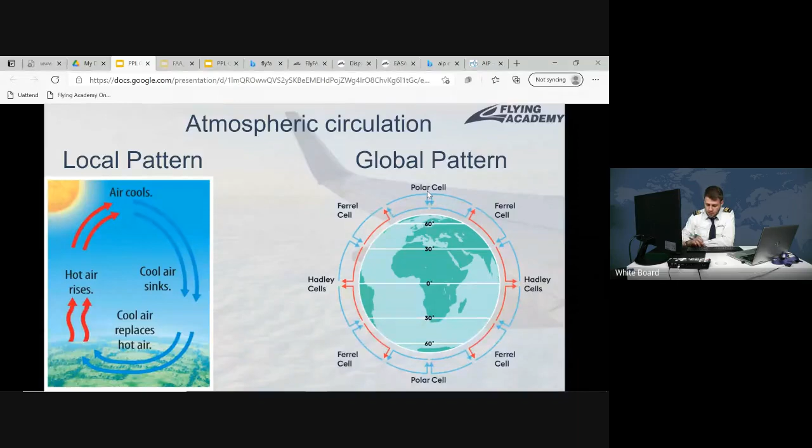Lost the word. Polar cell. I mean, around the area of 60-degree latitude, and high pressure area over the pole, speaking about the ground. And vice versa for high altitude: high pressure over the equator, low here, high here, and low over the pole. Okay? Now we finished with the high band. We're now getting closer to the ground.

Wind direction and local wind patterns. So what causes the wind? We spoke about this today. The wind is caused by a pressure gradient, differences in pressure per unit of length. A high pressure area has more air molecules, and we spoke at the beginning that more molecules means more density, more pressure. The low pressure area has fewer molecules, so lower pressure, and you have the wind because these molecules have more energy. They conquer the area of lower pressure. So this is the direction of the wind.

Now, the strength with which this wind is moving is called the pressure gradient force. The force that arises from the pressure gradient and causes air to move is called the pressure gradient force. Where is it directed? In the area of high pressure, it's directed away from the high pressure. In the area of low pressure, it's directed towards, because low pressure is surrounded by higher pressure, so it rushes in. High pressure is surrounded by lower pressure, so it pushes away. Make sense?

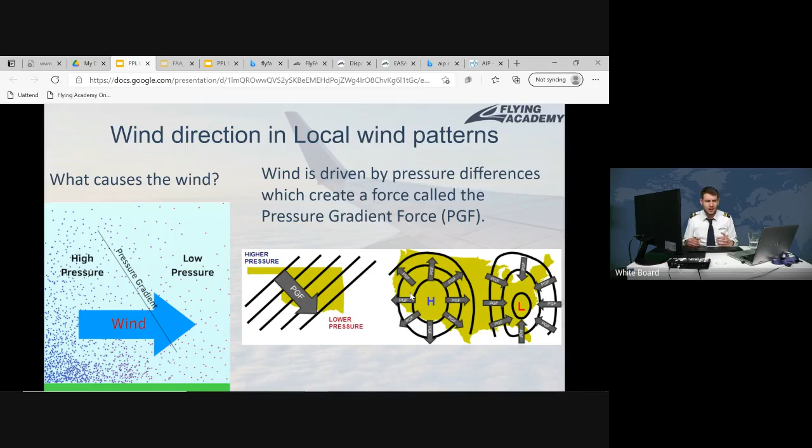We've tricked you, guys. At the end, you will have the car driving exam. Today is a car day, apparently.

So that's what dictates the wind speed. However, the pressure gradient is only one of three forces that affect the flow of the wind. The second and third forces are, correspondingly, the Coriolis force and the friction force.

So we have components of the wind that affect the magnitude. That would be pressure gradient and the friction, and then direction would be pressure gradient and Coriolis. The higher the friction, the slower the speed. Make sense? Because friction is a waste of energy: some molecules are hanging on obstacles, terrain, whatsoever, and then the next adjacent molecules are decelerating because of those previous ones, and so on. So the higher the friction, the less the speed.

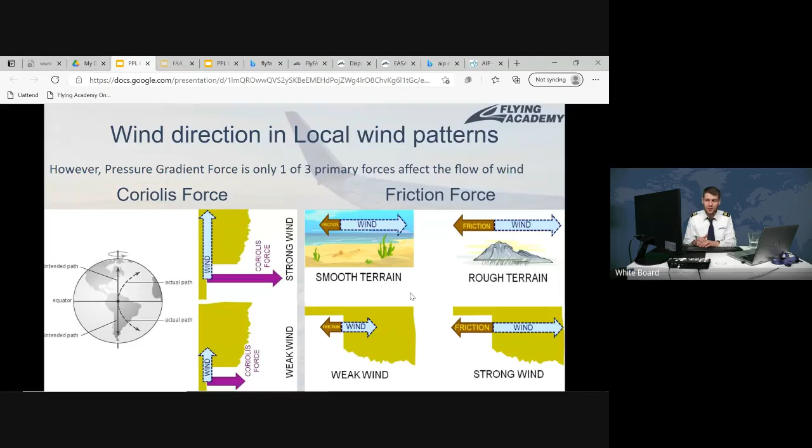And we already spoke about the pressure gradient. The pressure gradient and the friction define the speed. Now the direction would be defined again by the pressure gradient, because where we have the step from higher pressure to lower pressure, that way we would have the movement of the air, and Coriolis force. Coriolis force would be another component which will affect the direction, because we already expressed why. The cars, again. So when those three forces are combined, we would have a certain type of wind.

We may have the geostrophic wind, which blows parallel to the straight isobars, and the surface wind, which would not be flowing along the isobars. Let's speak about the upper airflow, the geostrophic one, the one that blows along the isobars. So why do we have this? Because we have the direction of the pressure gradient force, from higher pressure to lower pressure. Then, as the air starts moving, the Coriolis force comes into play and tries to deflect it the opposite way. Eventually those two vectors find the balance, and you have the wind blowing along the isobars, and this is called the geostrophic wind.

This slide depicts it visually. Now, the surface wind, however, would be slightly different, because we will have the friction force, which will decelerate the wind, and so the Coriolis force will be able to fight back a bit, and the whole system will be affected, and thus deflected. Because we have this additional vector which decelerates the wind, it's now pointed more towards the pressure gradient force side.

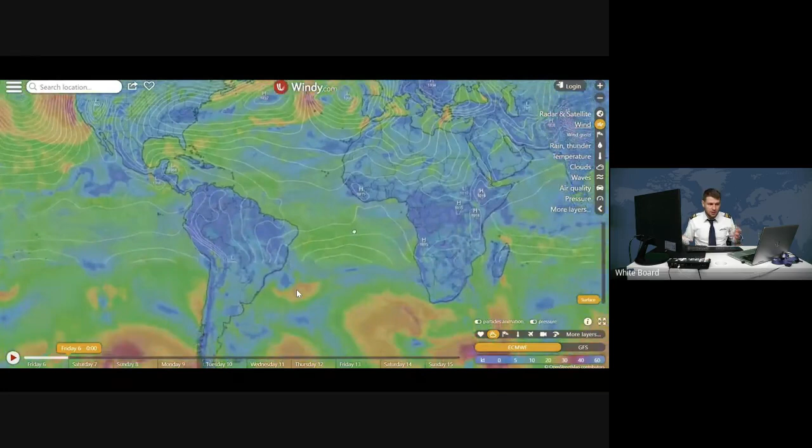Because in the northern hemisphere everything is deflected to the right with respect to the movement, in the southern hemisphere everything deflects to the left with respect to the movement. So this is why in the southern hemisphere we would have vice versa: high pressure areas rotating anti-clockwise, low pressure areas rotating clockwise.

Let's find the low pressure. Air wants to rush in from the area of higher pressure to the area of lower pressure, and it's deflected to the left because the rotational velocity of the area which is closer to the equator is faster. So this ball just doesn't hit this area and flies away. So this is why you have deflection to the left.

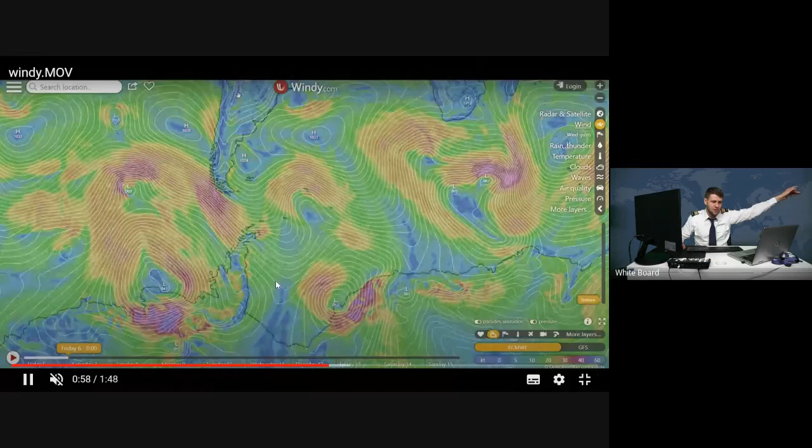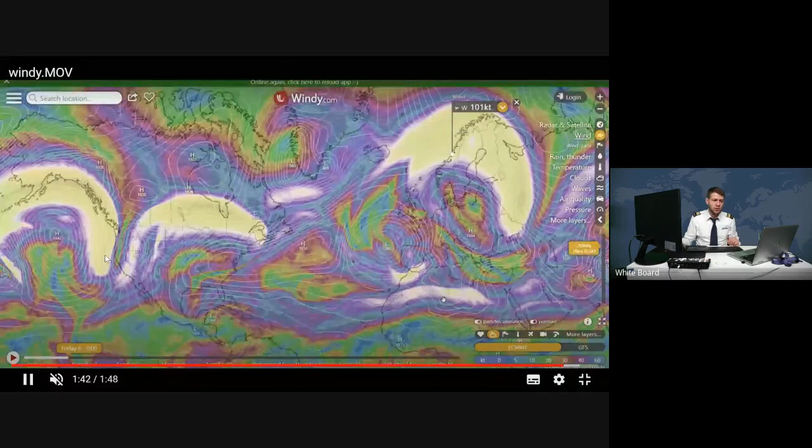And of course, if we scale out, so this is at the surface. If I climb to flight level 340, I would even see the jet streams. Here the white areas are the areas of higher velocity. You see 102 knots, 101 knots. So the jet streams are pretty fast moving currents of air.

This is why flying from America to Europe is faster than from Europe to America, because you fly with a tailwind from the US and with a headwind to the US because of the jet streams. If you paid attention, the jet streams were not as accurate as they were on our slides. This is because the model is one thing and reality is another.

The polar jet stream is shattered, because many segments of this polar jet stream go over the water, there are not that many steep gradients, some water currents are hitting areas from below, and some continents receive more insolation. So there is no uniformity as in those models we were discussing before. However, the general logic still works, and you saw the direction was to the east, from west to east.

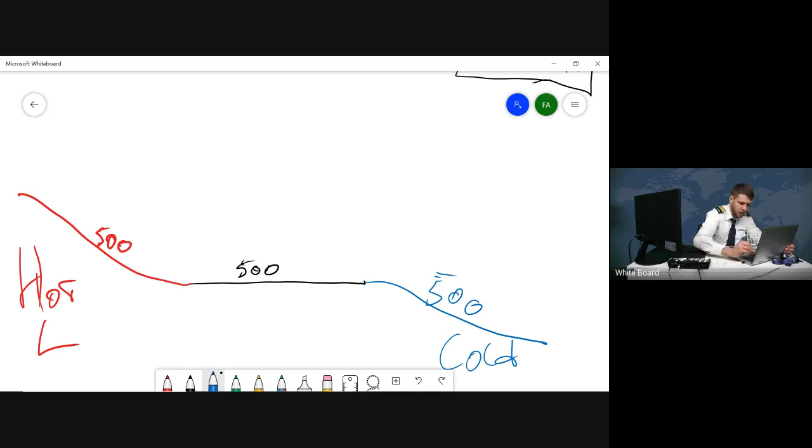So we are going to the area of the hotter air, and here is cold, because that one is the 500 hectopascal isobar. Hot air, so we have hot air ascending. We have low pressure here and high pressure here. This is the northern hemisphere, so the high pressure rotation is clockwise, the low pressure rotation anti-clockwise. We are flying and the wind is coming from the right. In between them, what do we have? How are they connected?

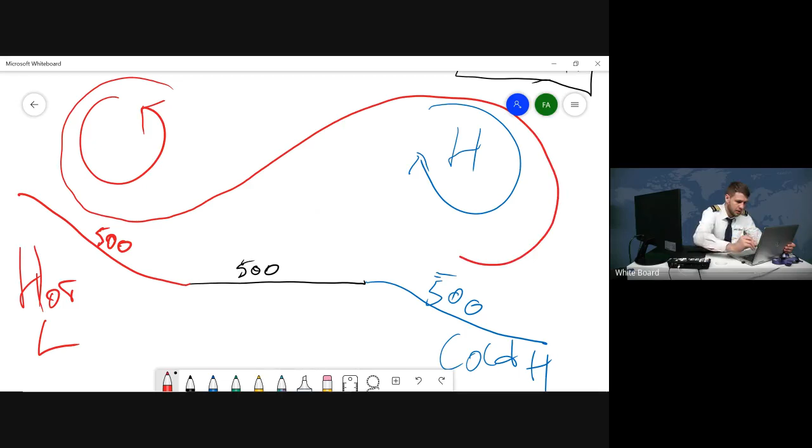Sorry, my head just stopped working. Okay, let me draw extensively. So it's like this and like this. The wind is coming. Are we going from the east to west?

Guys, this definitely makes some sense, but I don't know. I just have some mental lock on it.

From the east to the west in the northern hemisphere, wind is from the right. I'm gaining altitude because my isobar expands. So that should be... Okay, that's a good point, Duncan.

On the next uphill, yeah. The thing is that we can gain altitude only if we get into the area of the hotter air, right? Makes sense. So because the isobar is expanded in the hotter air, the hot air will be here represented by the...

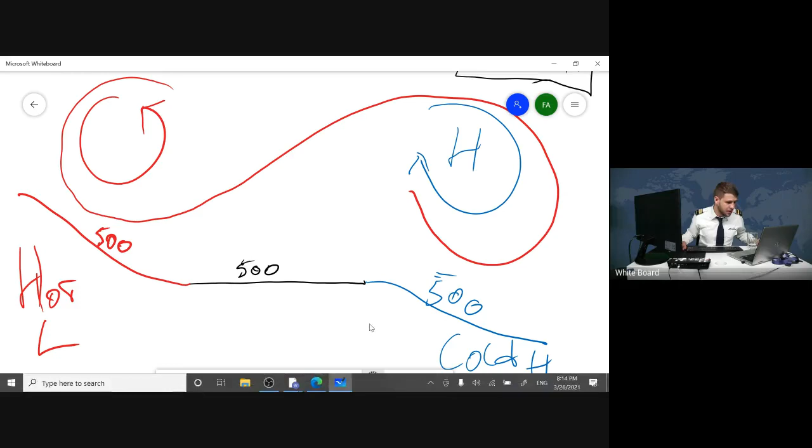Okay, now look at the trick. It's everything relative here because now I'm speaking about it respecting to the ground. Yeah, now I remembered myself. So this is the diagram respecting to the ground. On the ground that would be low area pressure, but if we go up, it would be higher area pressure, because of this expanded column.

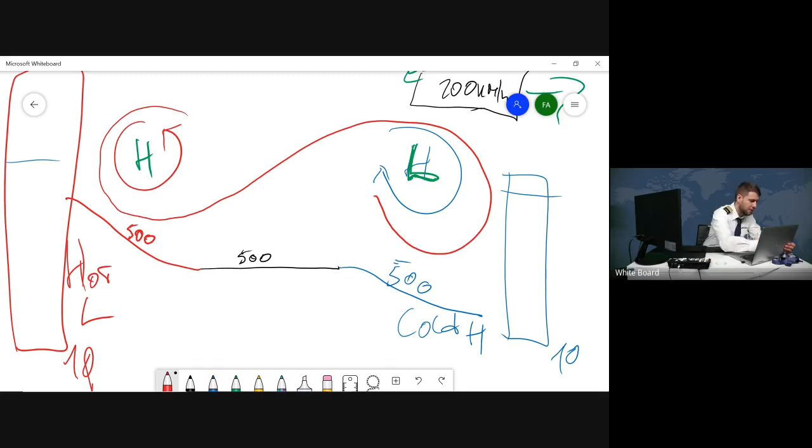So this is actually the hot one, this is the high pressure area, and this is the low pressure area, because the column here is that big, and here the column is smaller, but both of them have 10 at the bottom and 0 at the top. So let's say at certain altitude, like 500 to 18,000 feet, you will have maybe 4 units of pressure here and 1 unit of pressure here, because here it's close to the top, to the 0.

So this will actually be the high pressure area aloft, in the column of the hot air, as we saw on these boxes, on these columns before. So if it's hot...

If it's hot, if it's high pressure, this is high pressure. So a high pressure area rotates clockwise in the northern hemisphere. This is clockwise, this is anti-clockwise. Come on. And this one will rotate anti-clockwise, the low pressure area.

So we are approaching this area. The wind is blowing from our right. That means we are reaching the area of higher pressure, which is caused by the expansion. And our altitude, we are gaining altitude. Okay, got it.

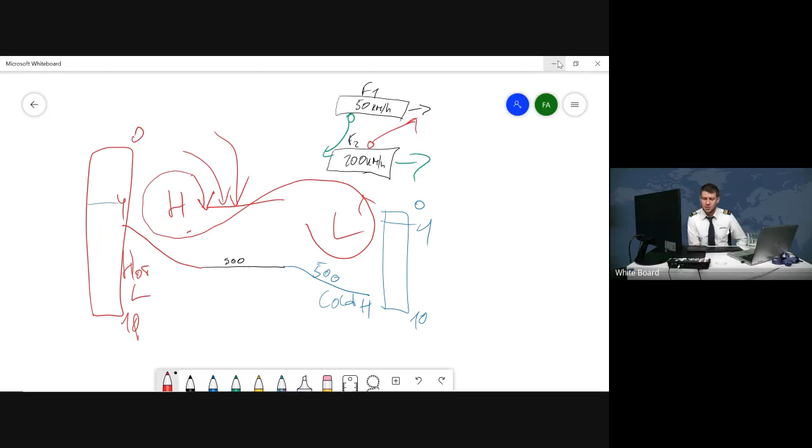It's like for gliders also, but we are speaking more about the pressure now. Hot air rises, this is also for the gliders. Guys, got it? No, seriously, got it, because it's important.

Okay, here, this picture, this slide. You have higher pressure, can only be moving then to hot. Yeah, because hotter air, the pressure at the given altitude is higher. The wording is a bit tricky because you need to know to which altitude a certain pressure level corresponds. But if...

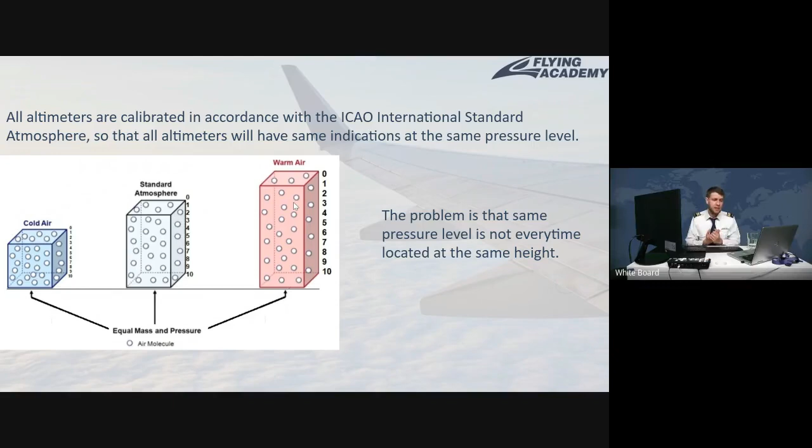So at altitude in hot air, you will have higher pressure. Hot air, high pressure rotates clockwise. You have the wind from the right as we drew in the picture, and thus you are gaining altitude, as on this slide, or on the picture from your classwork, the one from altimetry, this one. You are gaining altitude.